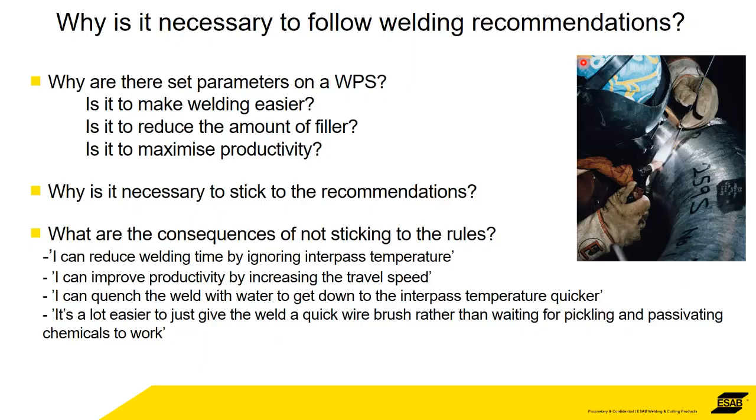So what's the point of a WPS, a welding procedure specification? Well, the welding engineer has gone to an awful lot of trouble to detail every single joint in the fabrication, and the whole purpose is to ensure that if it's welded to the parameters he's laid down, it achieves the required level of, firstly, mechanical properties, and alongside that the corrosion resistance properties as well.

The way that stainless steels and nickels are welded and post-weld treated greatly affects the amount of corrosion resistance that they have, and doing it wrong, you just won't get the levels that are required.

It uses the data sheets on the base and the filler material. All the manufacturers of filler metals and any kind of sheet, plate, bars produce data sheets giving their recommendations. It's got the properties that the base material is supposed to have, their recommendations for welding, and alongside that, historical data. Usually this has been welded before, the design is not new, so you can use historical data.

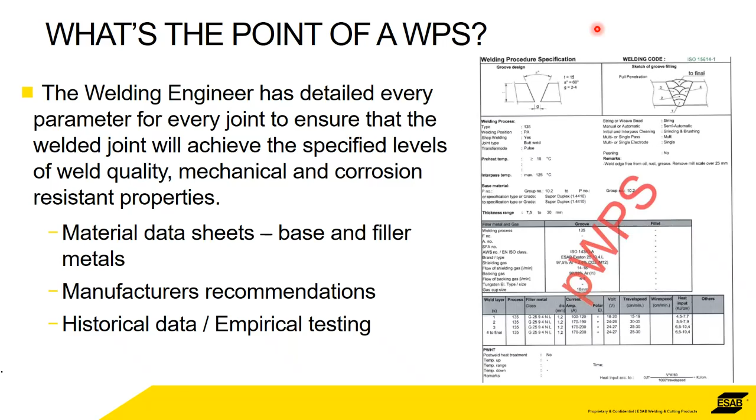But ultimately, depending upon the position and the requirements of the weld, empirical testing. You have to prepare welds and test them to destruction to make sure that they're fit for purpose.

So anybody that can weld can tell a bad weld just by visual inspection. You can see if there's excessive amounts of spatter, if the bead shape itself looks terrible. You can see porosity if it's in the surface, and then cracks as well, obvious signs of a poor weld.

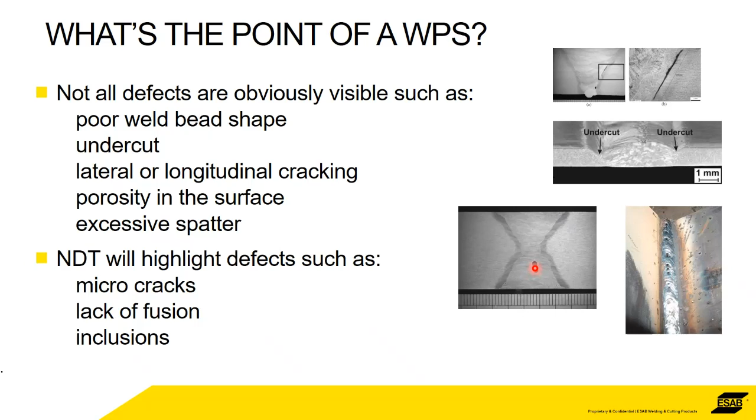Even the basic NDT methods will highlight any micro cracks or lack of fusion in the sidewall, or indeed inclusions or porosity within the weld itself. So you can do that with NDT. Yeah, that's fine. However, some of these problems occur that are not visible and are not possible to detect with NDT.

So what happens if you ignore the parameters for interpass and heat input, or you cool things down too quickly? So this is an example of a stainless steel pipe that, on the face of it, the weld looks pretty good. There may be a bit of heat tint, but you don't really know that from a photograph. However, in service, this construction lasted about a month. It's stainless steel. It should have lasted years.

And when the weld was microsectioned and looked at under a microscope, it was very, very obvious that too much heat had been put into this TIG weld. So much so that we had what's called sensitization. So basically, you get a precipitation of carbides at grain boundaries. So essentially, you're robbing the stainless properties of the steel.

It's got sensitized, so it's not stainless steel. Essentially, in a nutshell, it's not stainless steel, so it rotted. And on the face of it, it looks a good weld. You'd be pleased. Well, I'd be pleased with it.

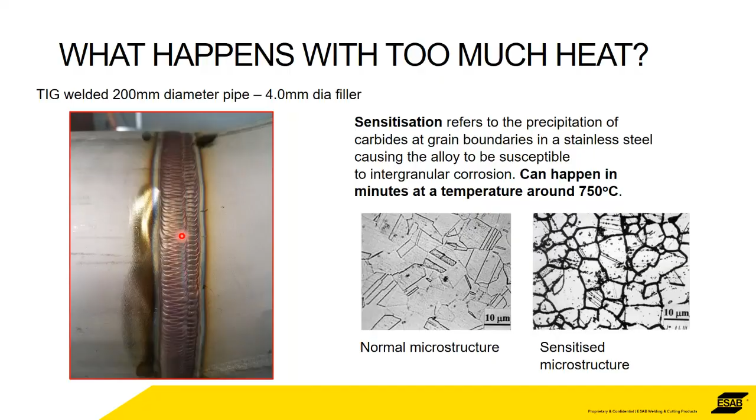So, particularly with something like Duplex stainless steels. Duplex, as you know, is a mixture of austenites and ferrites. That's a good Duplex structure. You've got a nice mix, and that's what you're trying to achieve when you're welding and it cools down. You're trying to get in the middle of the road just the right amount of heat to enable the structure to reform as it's supposed to.

If you ignore the interpass and you think, I'll cool it down with water, quench it with water very quickly, then what happens is massive grain structure is promoted, and it's very brittle. So this thing does not have the same properties as this. It's not a properly formed Duplex structure anymore.

If you put too much heat in there, you're going to put an extra pass. You've gone over the interpass temperature, or generally you wound things up to put maybe a bigger run. Then you get these intermetallics, sigma phase, this dreaded sigma phase that we talk about with Duplex stainless steels. So these are intermetallics that are coming out in the microstructure, and essentially these are points of weakness.

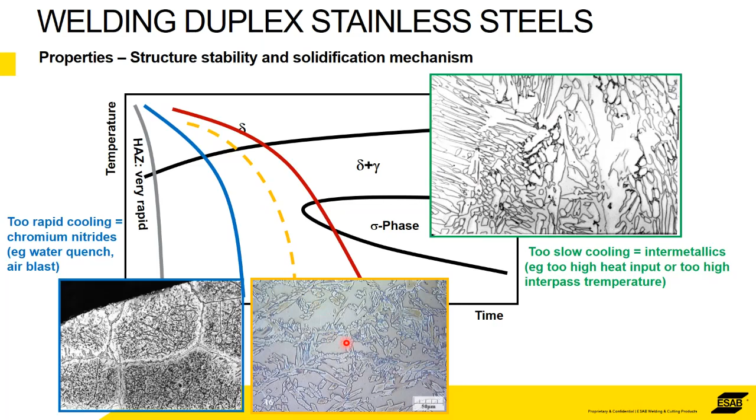So the black dots are areas that are not Duplex stainless steel. These are points of weakness, and if there's enough of them, then you're taking away both the mechanical and the corrosion resistant properties of the steel. Okay, so it's very important to follow the recommendations. That's why they're there, in order to be able to achieve this kind of structure for a Duplex stainless steel.

Just a quick note on post-weld cleaning. Pitting corrosion. Pitting corrosion is particularly important and relevant to oil and gas fabrications, for example. The materials selected are generally required to be resistant to pitting corrosion. So it's a particular type of corrosion that you're trying to avoid. This is a diagram really of the effect of the various post-weld cleaning.

So from a wire brush, you've got this much, and it doesn't really matter what the scale is, you've got this much resistance to pitting. If you grind it and get a bit better surface on it, then you can see the resistance is 3 times, 4 times better than with a wire brush. 4, 3, and 2 are mechanical polishing with progressively finer grain abrasives. So the finer that you get, the more highly polished it gets, the more resistance to pitting that it gets.

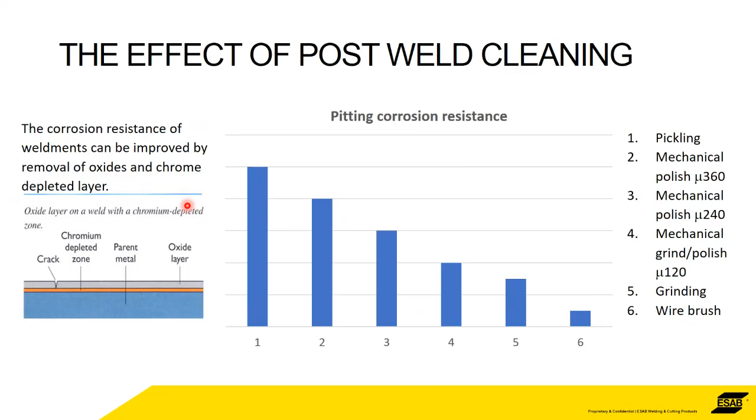And then ultimately, the best that you can achieve is by, number one, pickling and passivating. Then on this scale, you can see it's a good 10, 15 times more effective at increasing the pitting corrosion resistance. That's what I've got to say on WPSs and the importance of that.

Now I'll hand over to my colleague Tiago, who wants to talk about weld tracking. Tiago, off you go. Yeah, thank you, Peter. You can hear me properly? Yes, perfectly well, thank you. All right, wonderful. So, hey everyone, hope the webinar is interesting for you all.

I am Tiago Pereira. I am the product manager of Weld Cloud Notes, which is a software to manage welding documentation, essentially. I will be talking to you about weld tracking and why we should do it. If you'd move to the next slide, please.

What is essentially weld tracking? It is the concept of record keeping of welds that are performed in a company for a project. And this information needs to be kept by companies for a multitude of years. This depends on the criticality of the structure, but also on the contract, let's say for warranty purposes or just for traceability purposes. And all the information related to the project needs to be stored somewhere so that we can later down the line consult it somehow.

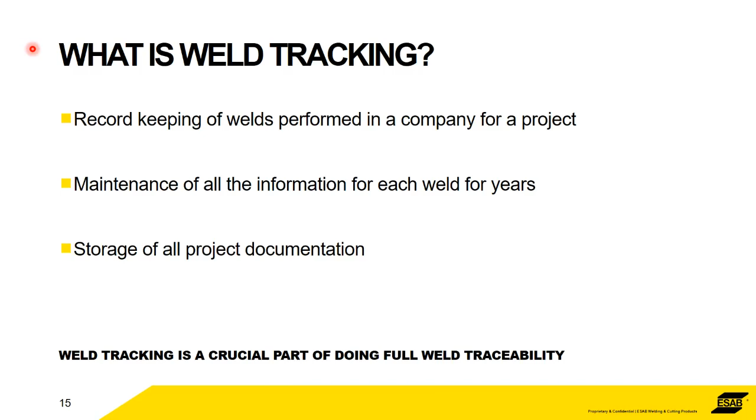And weld tracking is essentially a big part of what full weld traceability is. And it's a very important thing nowadays. Next slide, please.

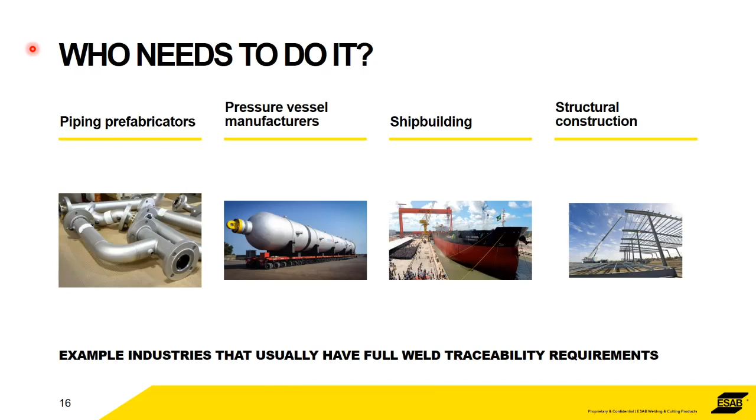If you'd move to the next slide, please. Just to give everyone a little bit of history and why it's becoming more and more important. So in 2010, there was a pipeline blast in California that killed people and destroyed homes. The power company, Pacific Gas and Electric, used standards that violated safety regulations. In essence, the main issue was that the company did not subject the pipelines to appropriate testing. They chose cheaper methods to save money, according to the prosecutors.

But in the end, what came to be found is that the problem was very poor record keeping. There was inaccurate and incomplete information. This is an actual consequence of the fact that there was no traceability. And part of this is because this pipeline was built in the 50s, and back then there were no such regulations, or the regulations were not as strict. And as such, it was hard to prove that in court. If you would move to the next slide, please.

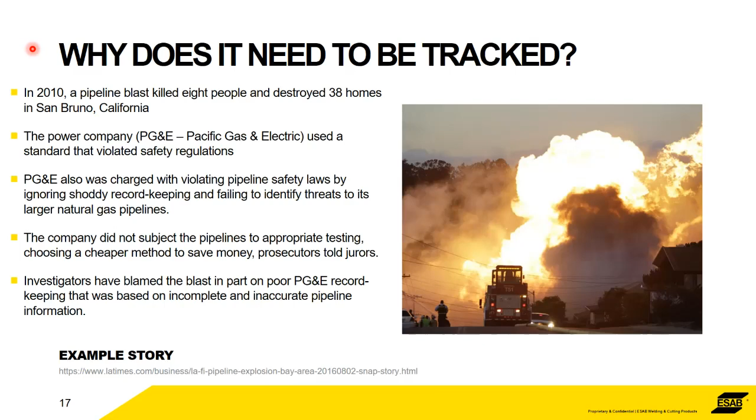So as we move forward in time, there have been standards developed in order to avoid the types of problems you saw in the story I just told you. One of which is EN 1090-2, which has been approved in European jurisdictions to be mandatory by law. So fabricators have to keep full weld traceability in some execution classes of structures, and this means they will need to keep record of each and every weld that they do. Of course, this is also related to the contract of these companies, but in general, this is on the part of the fabricator. So it's not just the end customer, it's not the energy company, it's not the bridge management company. The fabricator themselves need to keep this documentation as well.

Also, ISO 3834 is not mandatory by any jurisdiction, but it is more and more frequently being required by customer contracts, because this is a standard that defines what an actual welding quality system should be. Unlike ISO 9001, which is a quality standard but is not enough to treat a special process like welding, ISO 3834 is capable of ensuring the quality of your welds. And because it helps improve weld quality, it is frequently requested for piping jobs. Those kinds of jobs will request that your company is certified by this standard.

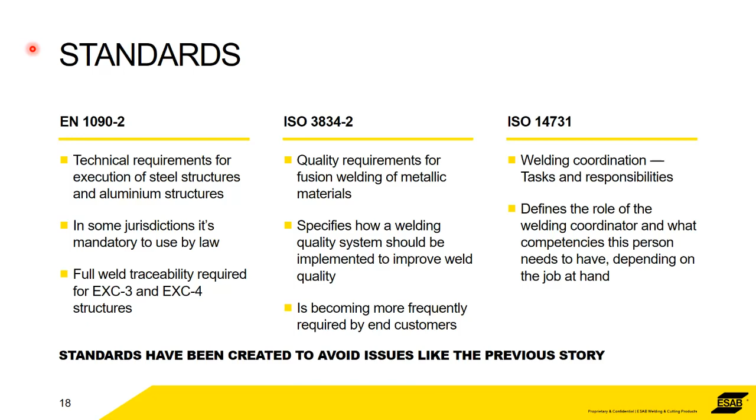And then there is ISO 14731, which is a standard that defines the tasks and responsibilities for welding coordination. It also defines what level of education the welding coordinator should have. For some roles, it will be required to have an international welding engineer. For some other roles, an international welding technologist. And for some other roles, it could be an international welding specialist. And these standards are pretty much to avoid these kinds of catastrophes, really.

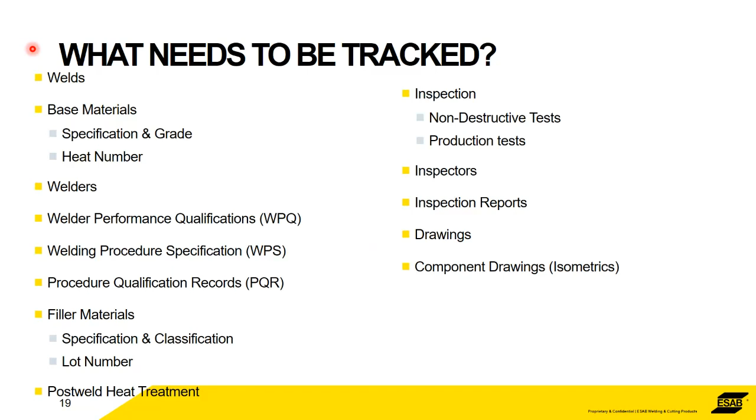Next slide, please. So I'm going to give you a rundown of what needs to be tracked. As you can see, there is a lot of information that needs to be tracked: welds, base metals, welders, all this information. This is kind of a summary, so I'm going to go deep into each of them. If you'd move to the next slide, please. So, base metals. This is, let's say, the main backbone of the industry. It's the material, for example, steel. Steel is the most used material all over the world for any structure.

But the thing you need to keep track of is that this steel will have a certain chemical composition. It's part of a production run, and it will have a heat number. This information needs to be tracked through a certificate, but the material itself, say a pipe or a plate, is frequently cut to match what you're going to build. If you cut a portion that does not have the heat number, you need to write it down to make sure that when someone goes to the shop floor, they can understand what material you're actually welding. And there are different levels of traceability for these certificates. The most common scenario is 3.1 certificates. And what does that mean?

So level 3.2 of traceability means that the chemical and mechanical tests of a specific heat number or lot are done by an external agency. The external agency will receive the test pieces and do all the tests themselves to ensure an unbiased approach. There's also the 3.1, which is similar, but with an internal department of the company doing these tests. So the level of bias is a little higher, but this department needs to be separate from production. And level 2 is essentially done internally, and it's not to the specific lot that the company ordered.

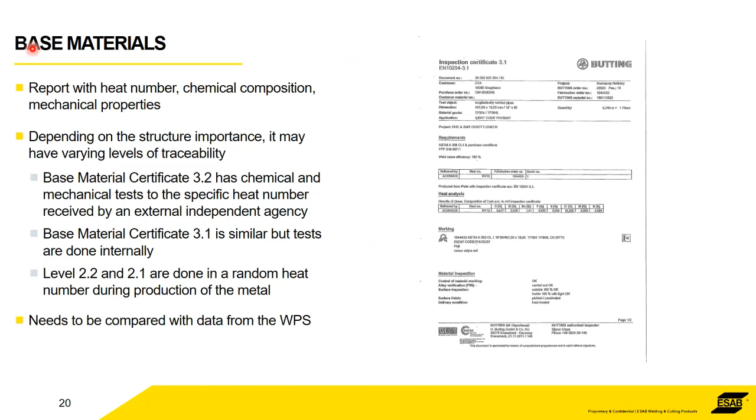But all of this is specified in the certificate, and you need to keep track of it for the whole duration of the project and further on. And this information needs to be compared with the data that exists in the WPS. What is the material to be used? It has to be this one that is written on the certificate.

Next slide, please. So filler metals is pretty much the same thing. Actually, in here, you'll see an interesting thing. We have an inspection certificate with 3.1 on the chemical analysis and 2.2 on the mechanical properties. So the mechanical properties are usually not as much of a requirement for traceability, and as such, manufacturers are usually okay with asking for a 2.2 test certificate. But the chemical composition is very relevant. We want to make sure it's from the exact lot that was done.

But in essence, this is very similar to the base material certificates. This information, the classifications of the filler metal, needs to be exactly the same as what exists in the WPS. And all of this also needs to be kept for a multitude of years.

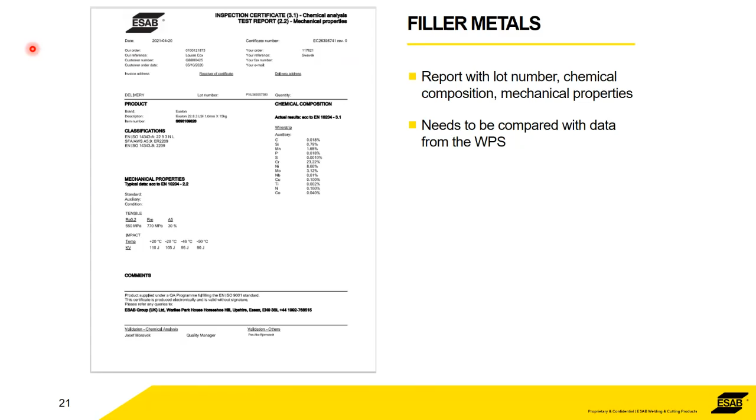Next slide, please. And of course, the most important document in terms of how to weld is this document, the welding procedure specification, that has all the variables that the welder needs to read and understand in order to weld. So there will be the parameters that he needs to set his machine, and he'll need to understand, is there going to be a preheat? Is there going to be an interpass temperature? He needs to understand the current, voltage and all that.

This is frequently generated by the fabricating company. The welding engineer in a fabricating company will write this down and put it in front of the welders. But for these types of structures, these documents need to be qualified, and they need to link to a qualified procedure qualification record.

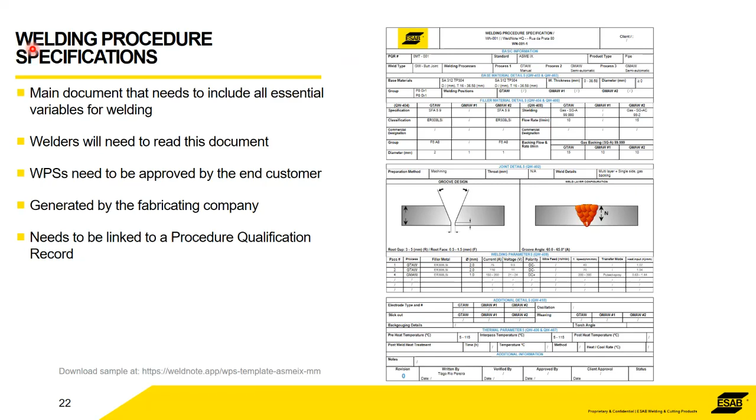If you move to the next slide, please. So this is the document. A procedure qualification record is the document that qualifies the company to weld a certain range of variables. And this is based on a test that is done outside of production. It's a test piece, it could be a pipe or a plate, and this pipe gets cut into multiple pieces, and it goes for a couple of other tests. But in essence, this is the information.

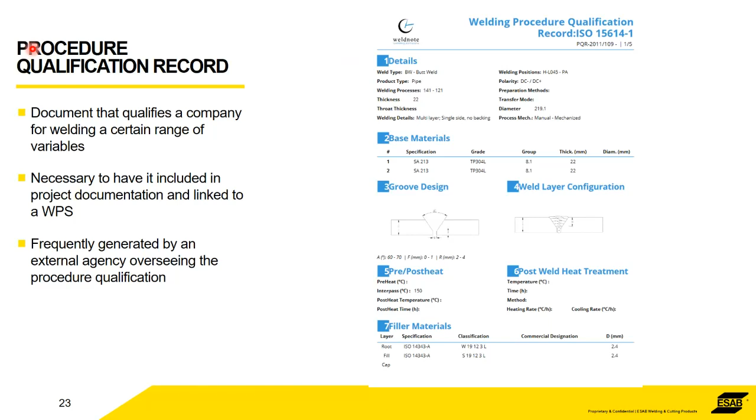This document needs to be linked to the WPSs, and this is the type of document that is frequently created by an external agency that will oversee the procedure qualification. Although there are cases where this document could be generated internally. The only problem with that is that if you are working with nuclear, oil and gas kind of contracts, it's frequently not accepted to create welding procedure qualification records in-house. You'll need to use an external agency very frequently. But yeah, next slide, please.

Also, naturally, the welders are the participants of the production, and you need to keep track of the people who were participating in the weld. And these people need to be qualified. A welder needs to be qualified to weld whatever is in front of him.

You need also to register the date of production, and this is also beneficial from a productivity standpoint, because if you are tracking repairs for each welder, you can understand if the welder is in need of additional training, or maybe he is in a location that is, I don't know, windy, and he does not have the proper protection, and as such, you may be able to understand what his problems are if you are tracking the data.

But in essence, tack welders, even though they are just doing a very small piece of the weld and it's essentially going to be melted over, need to be qualified on the same standard as production welders. So these welder qualifications, similar to the PQR or procedure qualification record, will provide a range of variables that the welder will be qualified for.

In this scenario, this document is also frequently generated by an external agency who is overseeing the performance qualification, but it can also be an internal qualification. In terms of welder qualifications, it is usually less of a problem not to use an external agency, but again, for high-profile contracts, the customers will request that welder qualifications are done by an external entity more likely than not. Next slide, please.

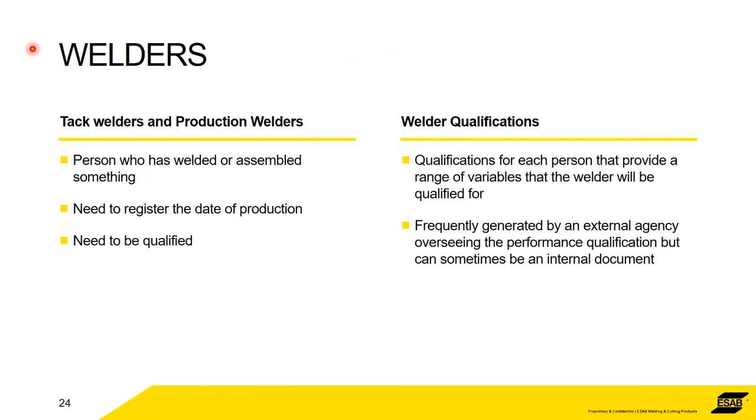Now into inspection. So these welds, unlike what Pacific Gas and Electric did, all of these welds, especially the ones that are in the more crucial kind of sections. So think about if you have two different sets of piping facilities, one of which is transporting nitrogen at -196 degrees Celsius, and another one that's transporting water at room temperature, you can imagine that the one at lower temperature may have more scrutiny. It's a more problematic weld, especially because at lower temperature, the steel in general performs differently than at room temperature. But in essence, all the tests need to be defined on a weld per weld basis.

It could be 100% visual testing, then it could be also 100% of magnetoscopy, and then you could have perhaps 50% of radiography, which means half the welds will be tested in their whole, let's say, circumference or length, or it could be 50% of every weld. So if it's a pipe, it would be half pipe tested. That is more or less gauged based on the risk analysis of each component.

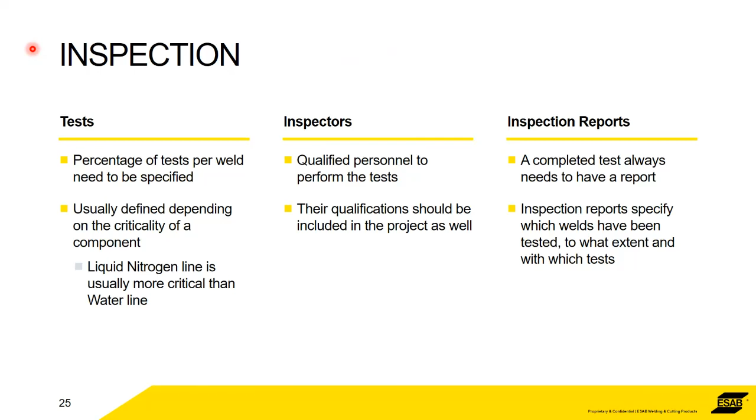Next slide, please. Also quite important, the drawings are essentially the design of the equipment or structure that is going to be done. It is very frequently done in two separate steps. There is a section for the design, these original or customer drawings, frequently done by the customer or by an engineering design agency. And then there are the component drawings or isometrics, which are, let's say, a zoomed in version of what is in the original drawings. These are the ones that are going to be interpreted by the assemblers or pipe fitters and the tack welders in order to assemble the pieces correctly and in the right direction. But all of these need to be tracked and they need to be linked to each individual weld. Next slide, please.

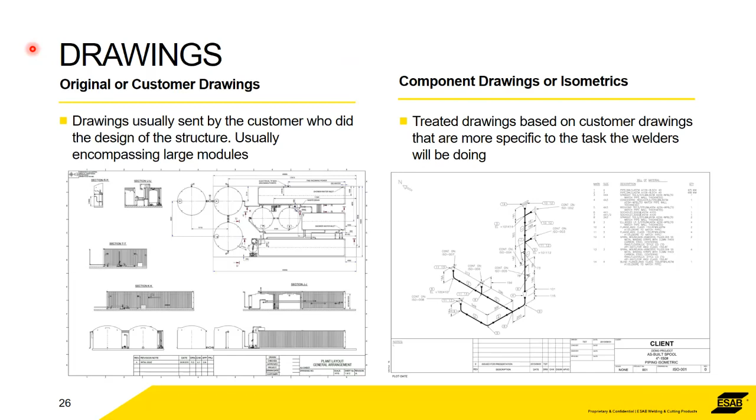And in the end, the main deliverable of these projects is companies need to put it all into a project package. And in this project package, you will have all the welds that were done. It could be 10,000, 100,000, it doesn't matter. It needs to be in the project package or multiple project packages that are a summary of all of the different parts. But every weld needs to be in the project package. And the idea is that not only the welds, but all the documents, base materials, inspection reports, filler materials, certificates, they need to be in here. And if you do that, you'll be able to have the full weld traceability.

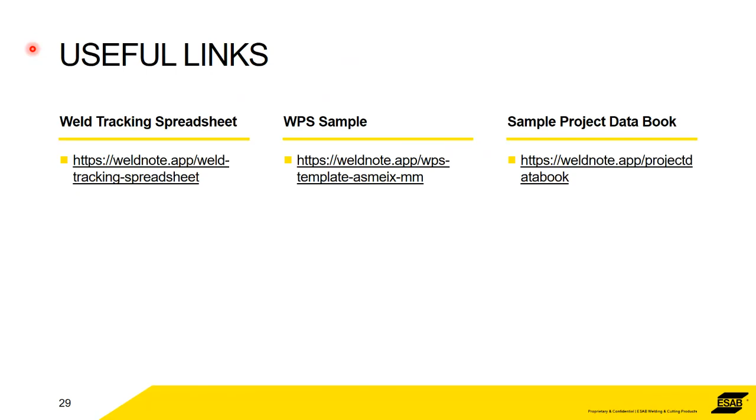And the first one is related to heat input and interpass temperature. And how close to the recommendation do we need to be, or is it okay to be close?